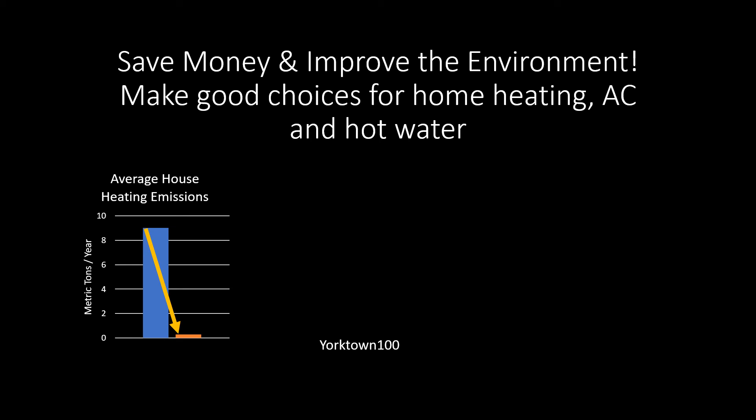Home heating contributes about 9 metric tons per year of greenhouse gases per household. We can bring that to essentially zero with the right choices. Join us in a simple 4-step program. 1. Leverage a home energy audit and reduce your consumption. 2. Purchase clean energy or install rooftop solar. 3. Make a plan for your systems and install a high-efficiency heat pump when it's right for you.

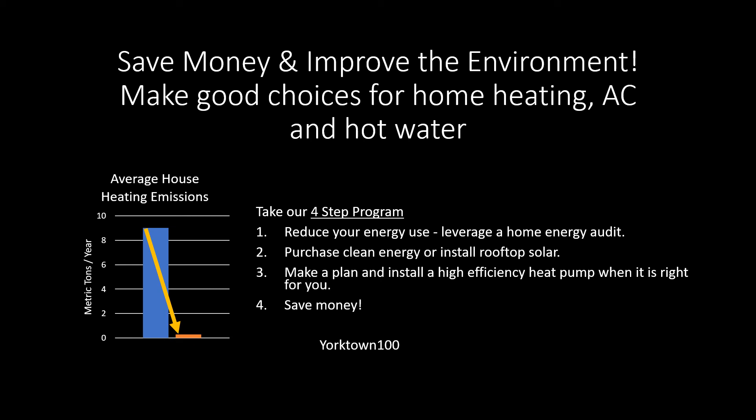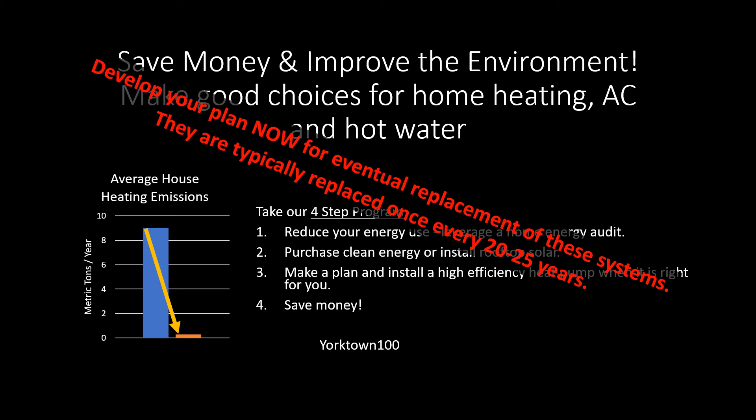And 4. Save money. Home heating, cooling, and hot water systems typically last 20 or 25 years. And our goal is to eliminate greenhouse gas emissions within 20 years. So it's really important to have a plan and make the right choice. Take the time now to study options and develop your plan. Don't wait until the last minute and your system fails and you're forced to make a quick decision. You have an opportunity to make the world cleaner, safer, and sustainable, and save money in the long term.

How can we heat our house? Well, one option is to burn something like oil, gas, wood chips to make heat, but that's always going to produce carbon dioxide and other pollutants. You could also use clean electricity to make heat by resistive heating, like in a toaster. That's really the most expensive to operate, and now it's obsolete, although some of these old electric baseboards are still in use. The amount of carbon emissions from a system like this would depend on how the electricity is produced.

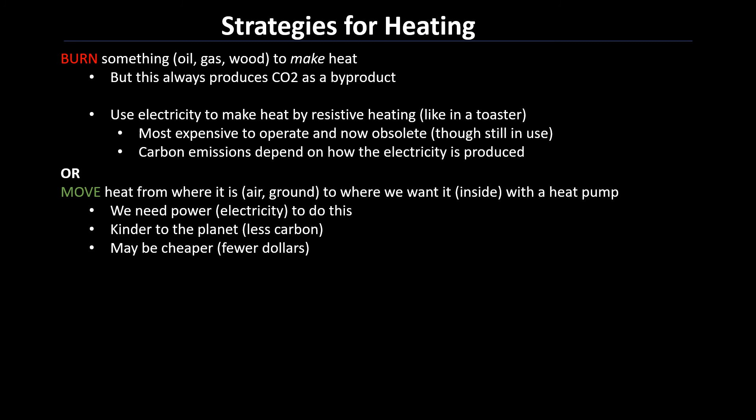A better option is to move heat from where it is, whether it be in the air or in the ground, to where we want it inside our homes with a heat pump. We need electricity to do this. It's kinder and gentler to the planet. It may be cheaper depending on your current heating system. And the electricity can come from a renewable source, as we mentioned earlier. And the system of a heat pump will do dual duty and act as a traditional air conditioner in the summertime.

Another option is to use sunshine directly. A passive solar house is really the best option. It's great for new homes, but it's not easily retrofit into existing homes. So we're not going to focus on that today. We should choose a system that adds no carbon dioxide and minimizes other pollutants. Is it really possible to choose a system that's clean and saves money? Well, let's find out.

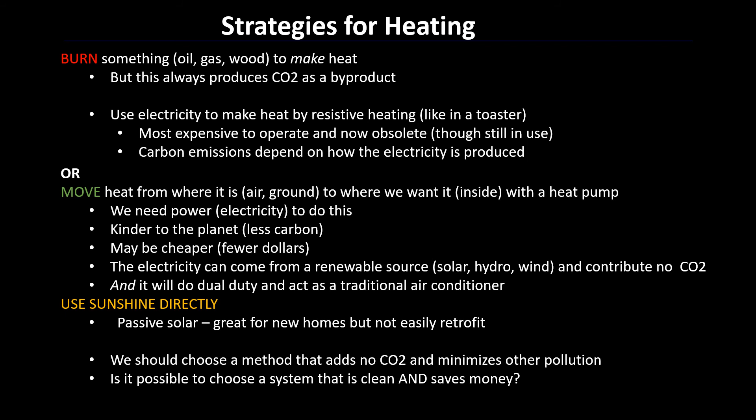First things first, let's take step 1, and that is to minimize the amount of energy and understand the energy use in your household. Get a free energy audit. You can visit the NYSERDA webpage to find details on how to do this. You'll probably find that you need to insulate better, minimize leaks, perhaps install a smart thermostat. You need to maintain your equipment with tune-ups and always change your filters regularly.

You should pay attention to what spaces really need to be heated or cooled, and don't condition spaces that you're not using. Don't leave doors and windows open with the heating or the air conditioning running. I do not recommend you use an open fireplace. It pulls more heat out of the house than it actually generates. But if you do use one, close the damper securely when you're finished. All of this can impact the size of the equipment needed and future heat pump requirements.

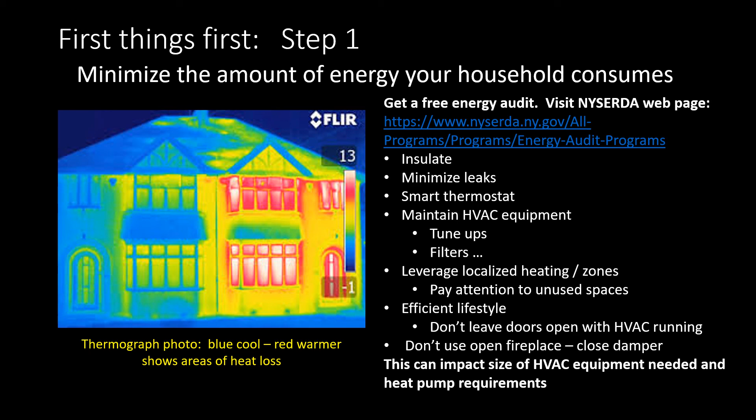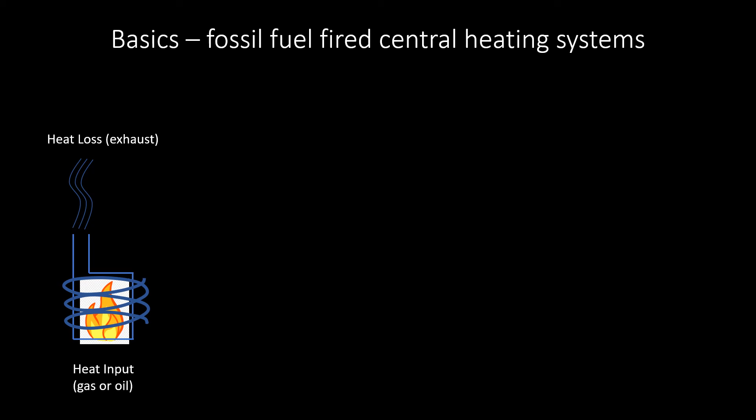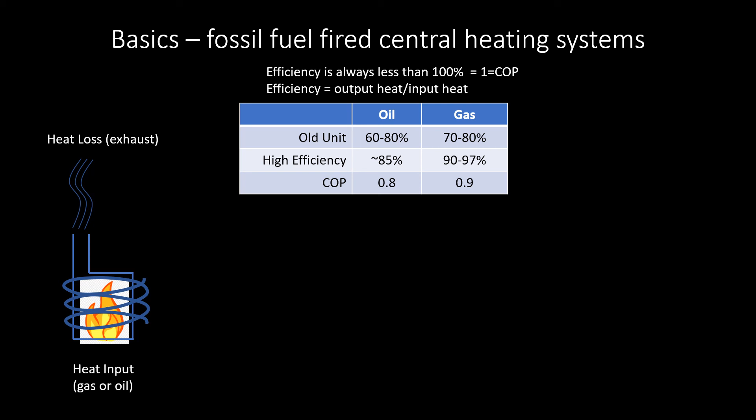We are going to step back and discuss the efficiency of fossil fuel-fired heating systems. All combustion sources produce CO2 and other toxic gases. These are vented outdoors via a chimney or pipe and always contain heat. Because of that heat loss, the efficiency of these units is always less than 100%. By the way, another way to quantify efficiency is coefficient of performance, or COP. That is simply heat output divided by heat input and is 0.8 or 0.9 when rounded for these cases. These heating systems typically distribute heat through the house either through hot water and baseboards or hot air and ductwork.

Now let me introduce you to heat pumps. As you know, typical air conditioning extracts heat from inside and moves it outside. An air source heat pump operates just like your air conditioner in the summer, but in the winter it operates in reverse and extracts heat from the outdoor air and moves it inside.

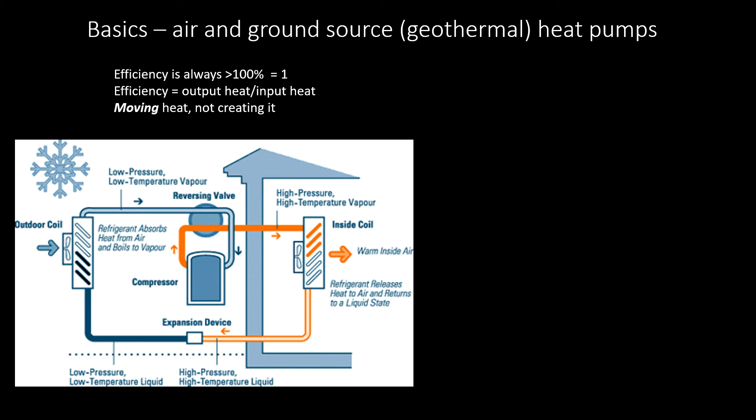In all cases, heat pumps operate at efficiencies greater than 100%. These units are very efficient and operate between 160 and 500% efficiency. That may surprise you, but keep in mind we are talking about moving heat, not creating it. Let me give you an example.

Say your house is 60 degrees inside and the weather outside suddenly warms up to 75 degrees. You open the windows and the house warms up to 70 degrees. The efficiency of that activity was perfect and obviously much greater than 100% since you used no electrical energy and used the heat in the outdoor air to heat your house. The heat pump does essentially the same thing by extracting and consolidating heat from outdoor air and moving it inside, but it can pull heat from fairly cold air.

One more thing about the efficiency of air source heat pumps. It goes down as the temperature goes down. That's why I show the range of 160 to 500% efficiency.

Ground source heat pumps operate on the same principle. They take advantage of the constant temperature in the earth to gain efficiency. They require that a well or trenches be excavated and operate around 430 to 450% efficiency. They have a dual benefit of saving energy in both heating and cooling situations.

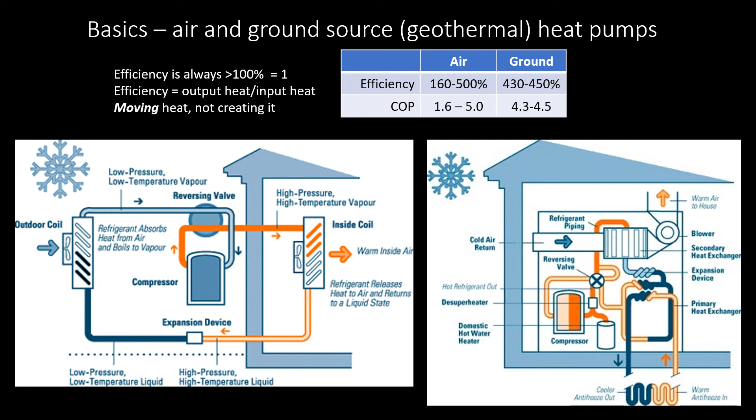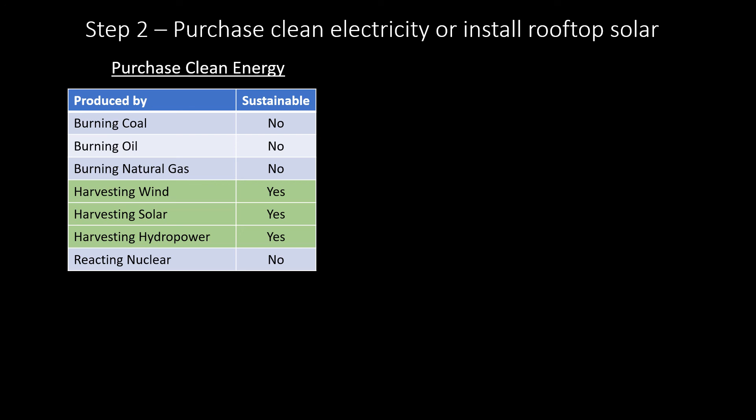As we migrate to electricity to heat our homes, it's important that the source of that electricity be clean and renewable. Wind, solar, and hydropower provide clean, renewable energy. You are free to choose any company you want to provide your electricity. These companies are called energy service companies, ESCOs. Choose one that provides 100% sustainable renewable energy.

Or you may choose community solar, which is available through Sustainable Westchester, and in that case you can save 10% off your electric bill. In all cases, your utility will still provide the service and maintain distribution. The Con Ed or NYSEG websites will provide direction.

Have you considered installing rooftop solar? If you have good sun on your roof and a south to southwest exposure, if you have a roof in good shape with say 25 years remaining on it, or if you're installing a new roof, and if you pay a high utility rate, the higher the rate, the better the savings. Today's systems look cleaner. They have a 25-year lifespan. There are great incentives now.

I've looked at net present value of a solar system in Con Ed territory, where we have some of the highest utility rates in the nation, and it will save 35 to 50% of energy costs depending on your financing rate.

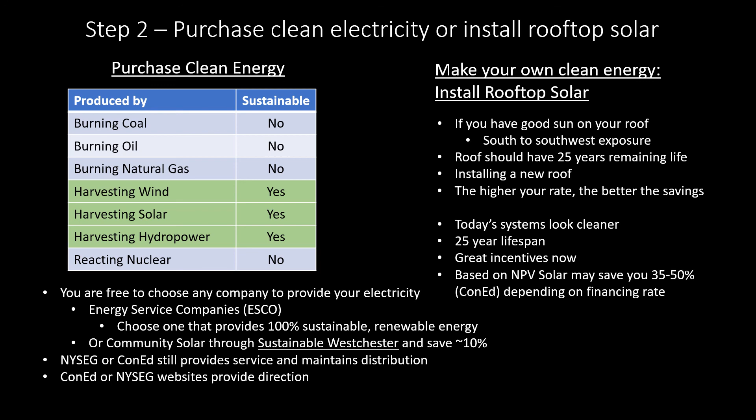Now let's talk about a subject near and dear to all of us, operational cost. This is what you pay month after month and year after year to heat your home. To make it simple, I have calculated all costs relative to the cost of oil heat. So the cost of oil heat relative to the cost of oil heat is 100%. If, for example, you heat with propane, your cost will be about 40% more. If you heated with old school baseboard electric, as we discussed earlier, it would be almost triple.

High efficiency gas is currently good from a cost viewpoint, but results in CO2 and methane emissions, both greenhouse gases. It is produced with fracking, which has many negative environmental consequences. Today's gas prices are the lowest they've been in the past 20 years. In 2005, for example, gas was about 10 times more expensive than it is today. It is uncertain what it will cost in the future.

For all electric systems, I figured that the homeowner purchases from a clean ESCO, as we previously discussed. You notice that for air source heat pumps, I show a range. This is because the efficiency of air source heat pumps varies with outdoor temperature.

Thus, depending on the average temperature of a given winter, the cost can vary. I'll talk about this more on upcoming charts. The efficiency of other fuels and geothermal for this calculation are constants. I've also shown relative costs for a geothermal system. It has the added benefit of cutting your cooling costs, probably about 50%.

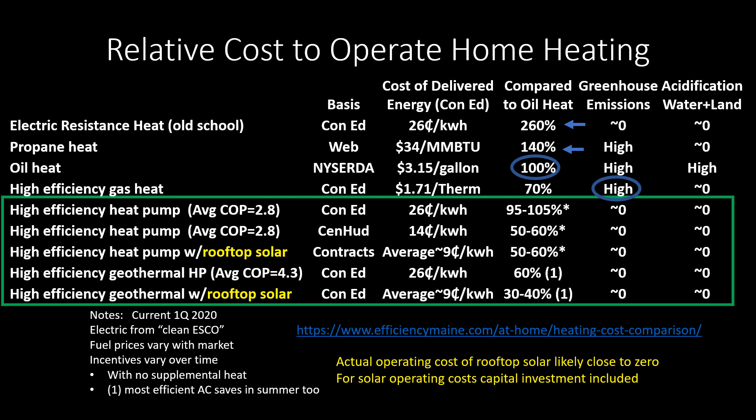Now let's examine the relative cost of installation. You can see that a heat pump will cost somewhat more than replacement of a furnace or central air conditioning. It may well save you operating costs, however, and if powered by clean energy, will produce no carbon emissions. I would never buy another plain air conditioner again.

I have shown some ballpark costs for geothermal. There are great incentives for this type of system, and it may be right for you. It does take up more space in your utility room, but saves money when it's very cold or very hot outside. Rooftop solar is often a wise and cost-effective investment, particularly if Con Ed is your supplier.

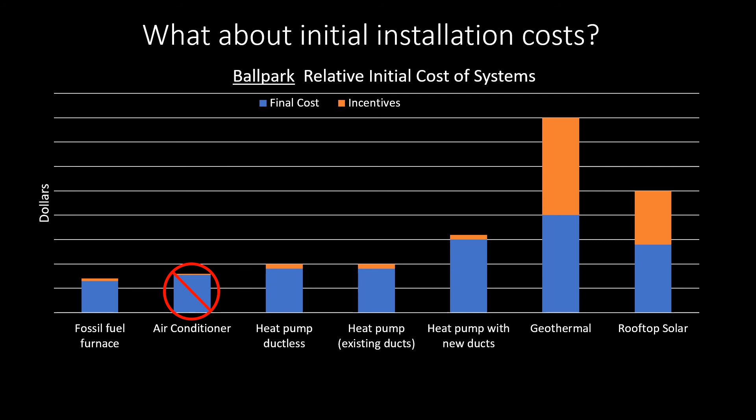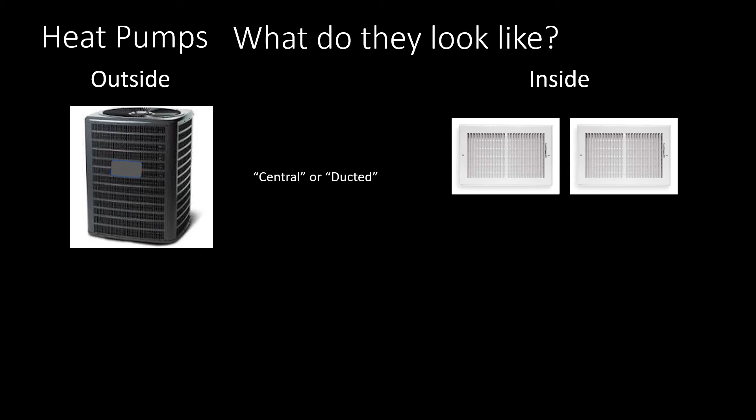Now, let's turn our attention back to heat pumps. What do they look like? Well, they just look like air conditioning systems. If you have a central air or a ducted system, the outside and the inside will pretty much look the way it does today. If you have a mini split or ductless system, they will look the same as they do today. However, again, they can operate either pumping the heat into the room or pumping the heat out of the room.

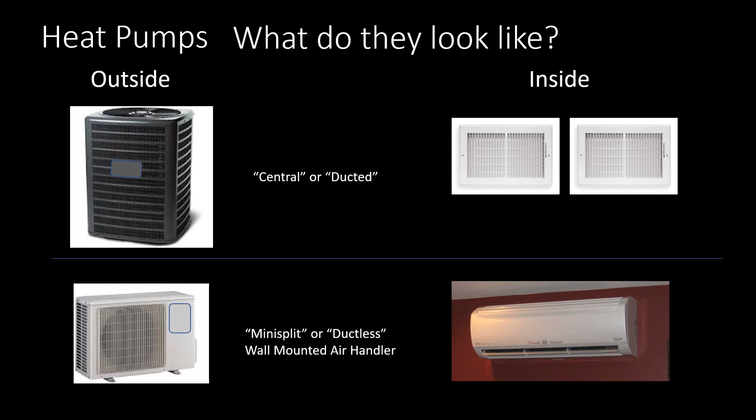Let's talk about what equipment you'll need to migrate to a cold climate heat pump. This depends on the starting point. What system do you have currently installed? If you have gas or oil-fired hot air, you simply need to install the heat pump, which again functions as your air conditioner.

If you have gas or oil baseboard hot water or electric baseboard, that means you don't have ductwork. You'll need to either install a fully ducted system or a number of wall-mounted air handlers to distribute the air within your house, and then the heat pump. This will be a more expensive transition. But if you have central air conditioning, regardless of what type of heat you have, you should install a heat pump that will provide you heating and cooling through that single system.

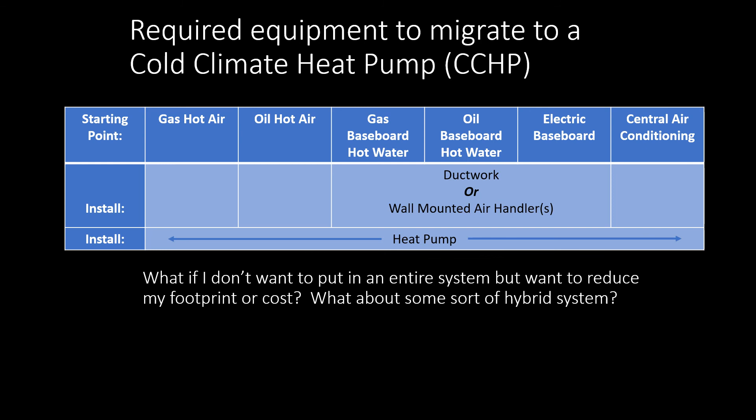You might be thinking, perhaps you don't want to replace an entire system. Maybe you have a fairly new system, but you'd like to do something in the right direction. Is there some sort of hybrid? Well, the answer is yes. A heat pump powered by clean energy can work with and complement your existing system. It'll reduce your carbon emissions and potentially save you money.

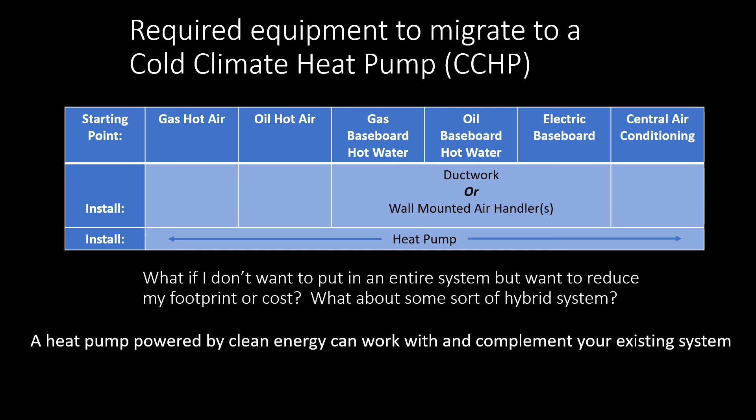Now we're going to talk about efficiency and what you would specify if you're purchasing a heat pump. In all cases, a heat pump also functions as an air conditioner, and you will need to specify a cold climate heat pump if you're going to use it for heating. The efficiency of these units drops as the outdoor temperature goes down. And to compensate for this and sort of give you an average number, they are now rated by Heating Seasonal Performance Factors, HSPF, and that's in BTUs per watt hour.

You would simply multiply that number by 0.29 to get an average coefficient of performance. It's sort of like the difference between degrees Fahrenheit and degrees centigrade. It's just a conversion factor. In all cases, higher means more efficient. However, more efficient units cost more.

The range for heating HSPF goes from about 8.5 to 15, and I would recommend that you purchase a unit greater than 10. For cooling, the seasonal energy efficiency ratio varies from 15 to 42, and I would recommend at least 20 for that number. The U.S. government actually has a website that has the ratings of every unit that's in production, and I included that link here for your reference.

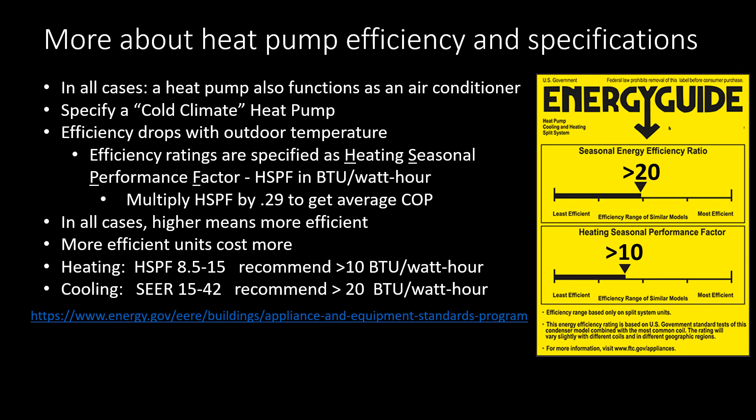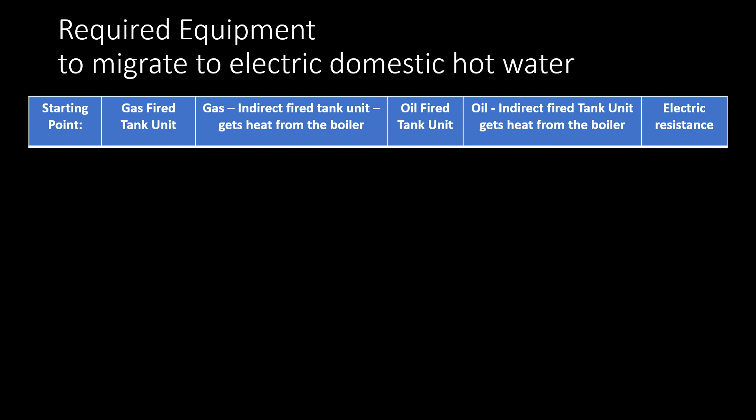Keep in mind, after you choose your heating system, you will still need a plan for hot water. Heating systems and hot water systems often go hand in hand. Sometimes they're integrated, sometimes they're completely separate. So you'll need to make a choice as to how to provide hot water. For many people, the heat pump hot water heater will be the best option. And by the way, it also acts to dehumidify your basement. It'll operate at 2 to 3 times the efficiency of a regular resistance hot water heater.

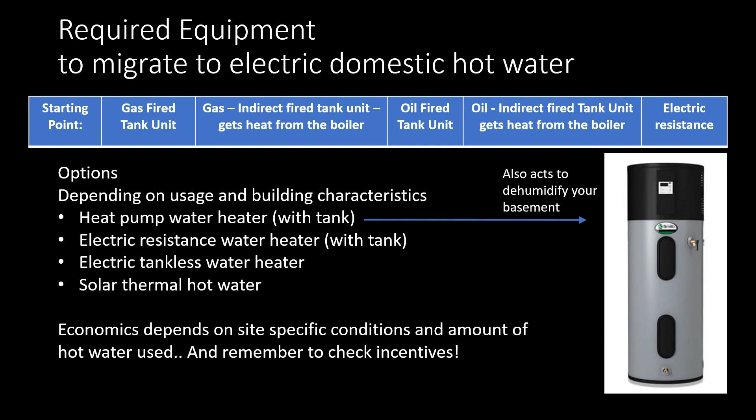However, if you use very little water, that old style resistance hot water heater may be fine for you. You could also go with point of source electric tankless water heaters, or you could choose a solar thermal hot water system. However, these systems have been falling out of favor in recent years. The economics of your choice depends on site-specific conditions and the amount of hot water used. And remember, check incentives. This is a photo of an actual house in Yorktown Heights, New York.

It was built about 4 years ago. It's very well insulated, has rooftop solar, heat pumps for heating and air conditioning, a heat pump hot water heater, and energy efficient appliances. Look for the Energy Star label. Bottom line, the house is very comfortable. It costs about 15% more than standard construction initially, but it makes more energy than it uses and emits 0 greenhouse gases for the life of the home. That's about 225 metric tons saved over 25 years.

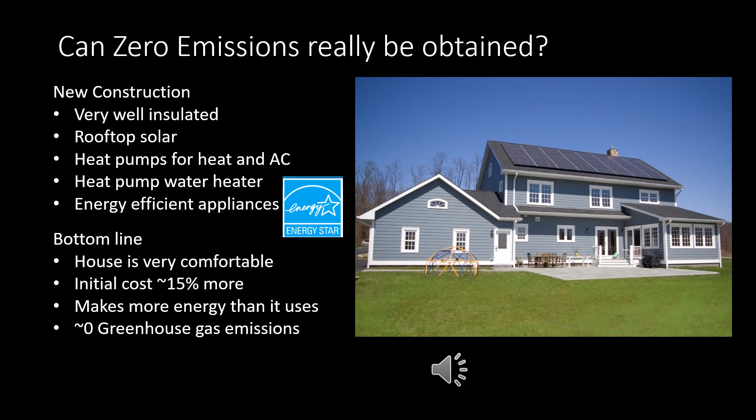Wow. Now it's time to talk about step 3, your plan. What should it look like? It's simply all the activities with their associated time frames. Each home will have a unique plan. I would recommend getting your home energy audit done right away. Have your friends and neighbors do the same. Then you can all discuss it as a group and learn from each other.

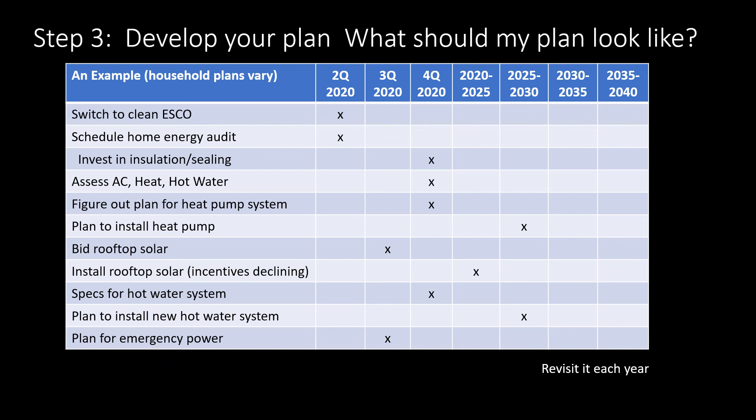Now it's time to take this journey together. Let's make good choices for a sustainable future. Let's each and every one of us eliminate that 9 metric tons per year of household emissions. Let's take advantage of rebates and incentives. While you do this, get good advice, qualified contractors, and always get multiple bids.

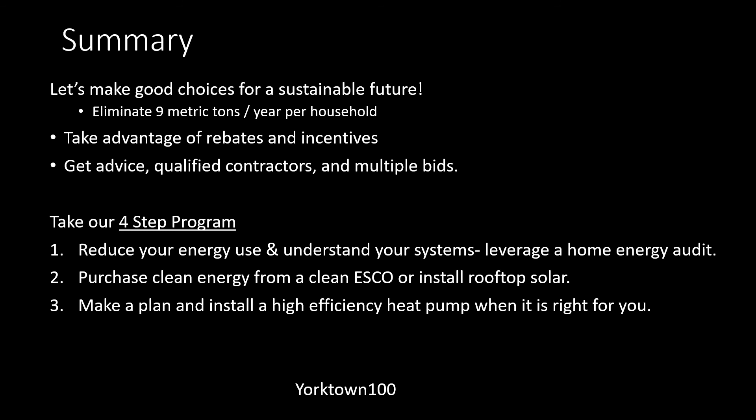Take our 4-step program. 1. Reduce your energy use. Leverage a good home energy audit. 2. Purchase clean energy from a clean ESCO or install rooftop solar. 3. Make a plan and install a high-efficiency heat pump when it's right for you. And 4, something we can all enjoy, save money. I look forward to taking the journey with you.